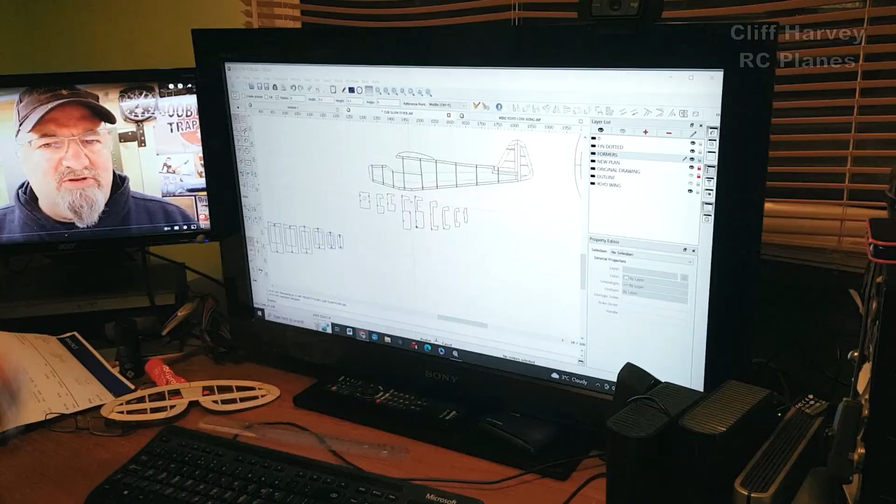I'm just working on the plans using QCAD, and I've got the formers done. I'm just putting in some sides here, just putting in these little ones down here. These are 1/8 square.

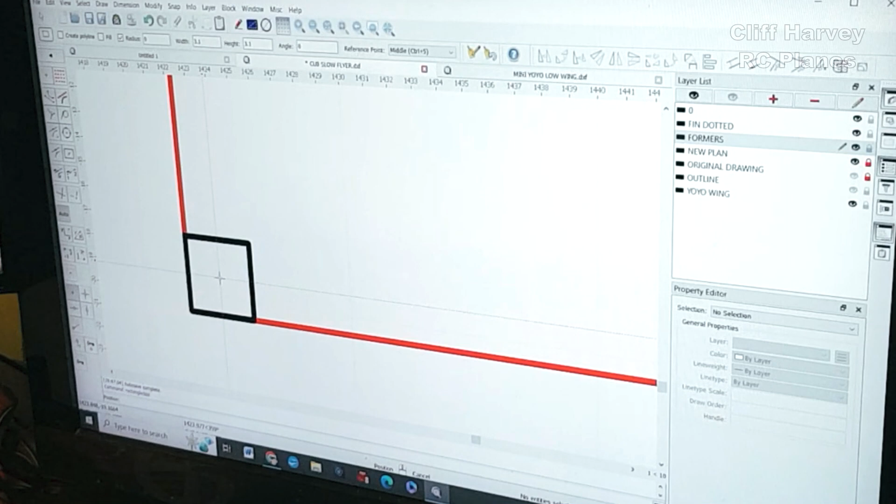Like that, each one has to have one. Although that one possibly not, because that one's okay.

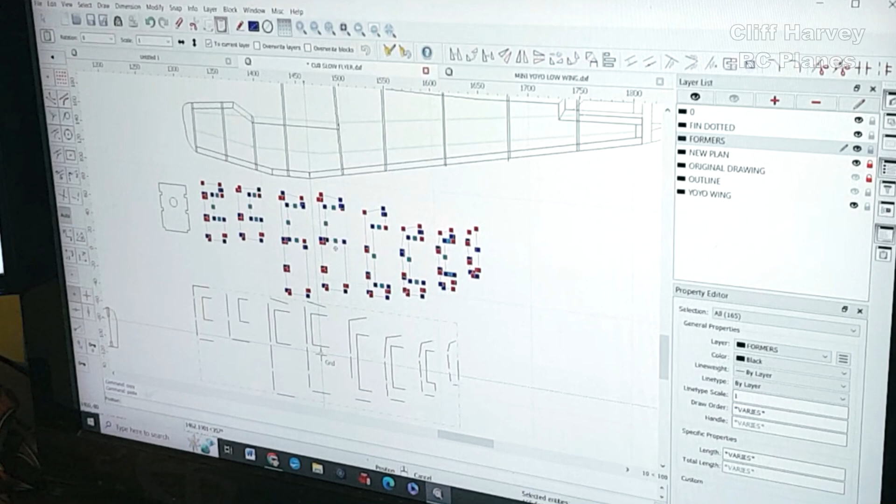I'm now going to copy these. Copy and paste. And now highlight them and reverse them, and move it horizontally. So that's all the other half of the formers.

So what I plan to do is make up a keel like that out of 1/16 by 6mm balsa, then stick the formers on one half at a time, put the stringers on, a couple of thicker ones at the top to support the wing, and then take it off the board and make another keel facing the other way.

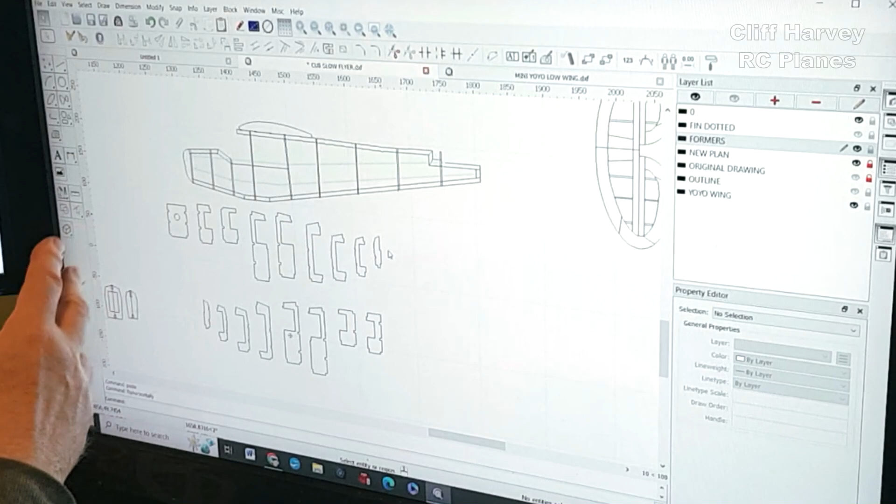To import these into LightBurn. That's good, look, just get 3 on there, look.

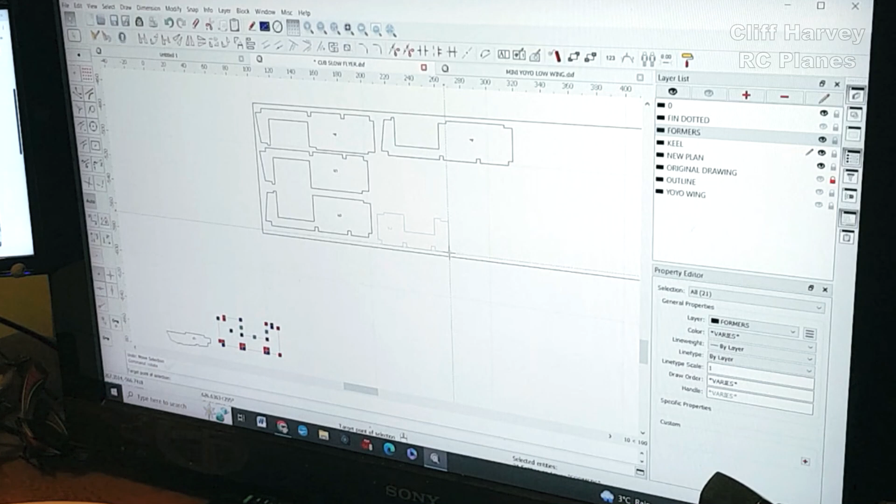I think there is software that will fit all these bits in onto the most economical layout. I don't know what it is. If you do, let me know.

I know I could have cut all these out and stuck them all together by now, but doing it this way, I can make small changes and I can replicate it and modify it to my heart's content.

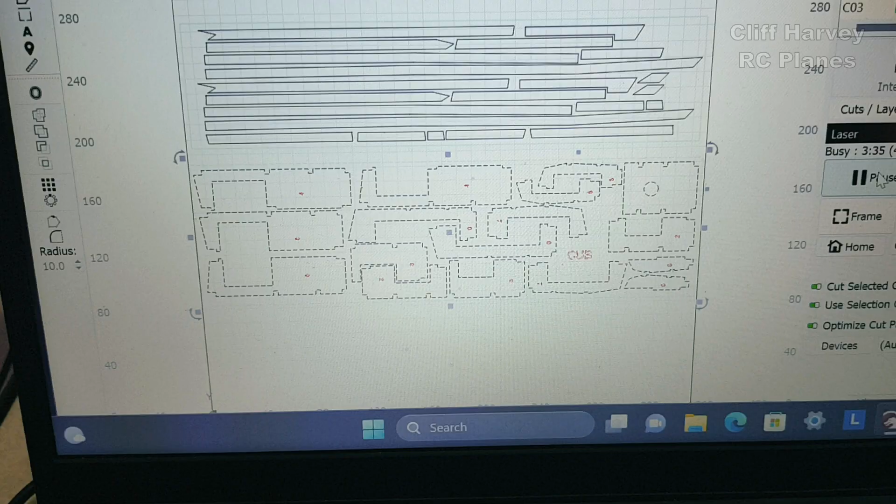Okay, in the workshop, and I'm cutting out the formers. So it took me quite a long time yesterday to draw it all up, but today 8 minutes is what it's going to take to cut them all out.

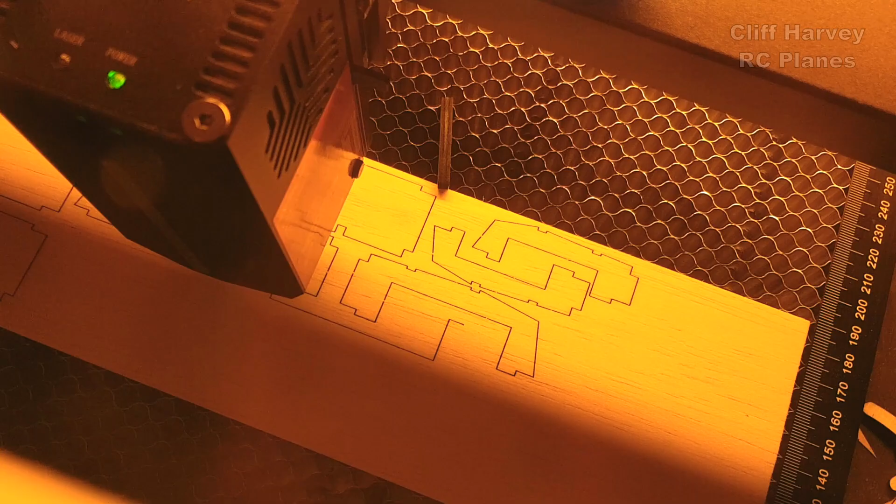It's taken me a while to get used to getting everything exactly set up. I'm getting there.

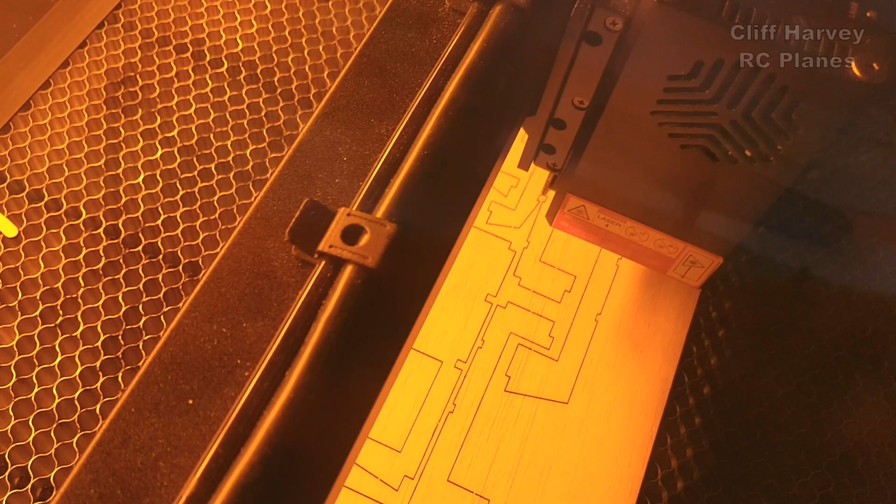Just to remind you, this is the Algo Laser Delta. Lovely machine. So just doing the keels now, and learnt a lesson there.

I could do with a couple more tabs because it's popped through there and it moves slightly. So you can see on the end of that one there, or you could see the shadow on it now, but there's little tabs to hold it all in place.

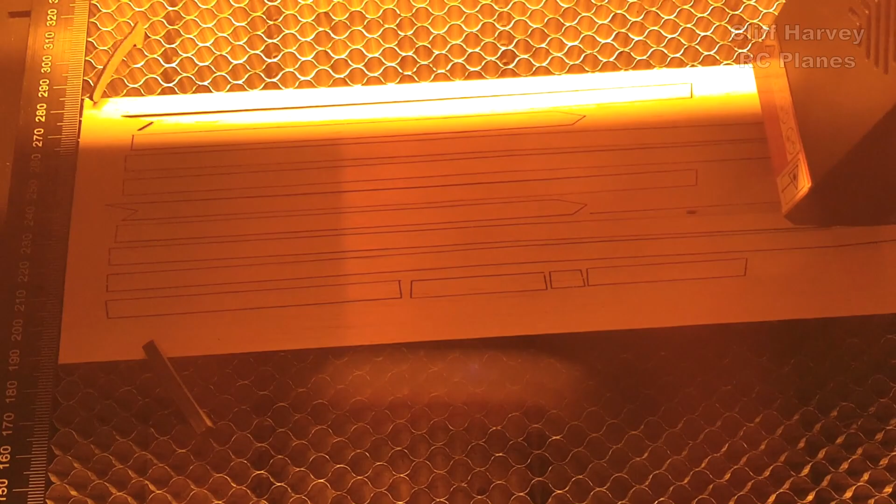But anyway, we're well on our way to getting this done.

Okay guys, welcome back, and I've got a printout and I've got my cutouts. Now I've got first job is to do the keel, and I've got 2 sets of keels here.

So very first job is to get all the bits of wood out and pair them up, and then start gluing them down to the board. So first of all, let's just get out all the parts.

They might just break out actually. Got a couple of tabs on the end there. Let me just get all these out and I'll be right back.

The burn is minimum on the edges, so I'm not worried about that. I did join it under the former.

Right, let me just make up the back of this and then I'll be back and we'll have a look at the formers. Should be a bit of fun.